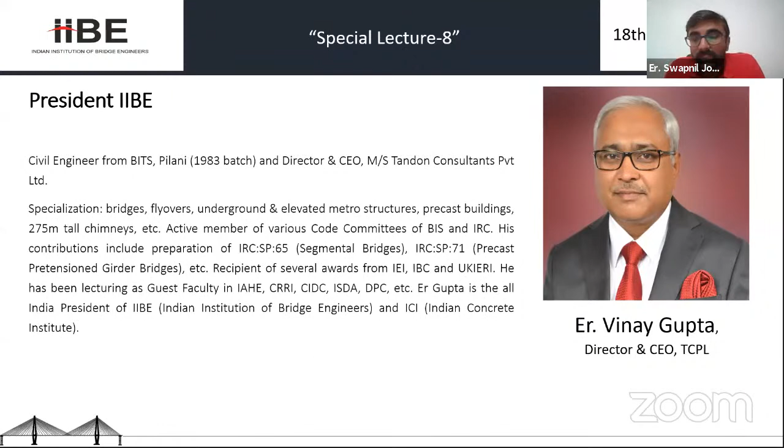So these both pillars are a great support for IIBE to grow further.

Now let me introduce our today's moderator, Dr. Gopal Rai, Honorary Secretary of IIBE and CEO of Dhirendra Group of Companies. Dr. Gopal Rai holds a PhD from IIT Bombay and has a phenomenal level of prowess that enabled him to associate with several prestigious projects including Apsara Reactor BARC, Mumbai Airport Bridge, Strengthening of Mithi River, ESIC Hospital, and JNPT ROB Bridge, etc. He is Honorary Secretary of IIBE, General Secretary of the Association of Structural Rehabilitation and Retrofitting, and a Committee Member of ISAC, BIS, and ACI.

He has delivered more than 680 presentations nationwide and 27 presentations internationally. He has also been a keynote speaker and author in 4 international conferences and published more than 100 research papers in various journals. Dr. Gopal Rai has also been awarded for 50 Manufacturing Innovative Leaders at the World Innovative Congress Award 2019, and also in Dubai for 40 Most Influential Leaders under 40 years, 17-18, by Asia One, and many more.

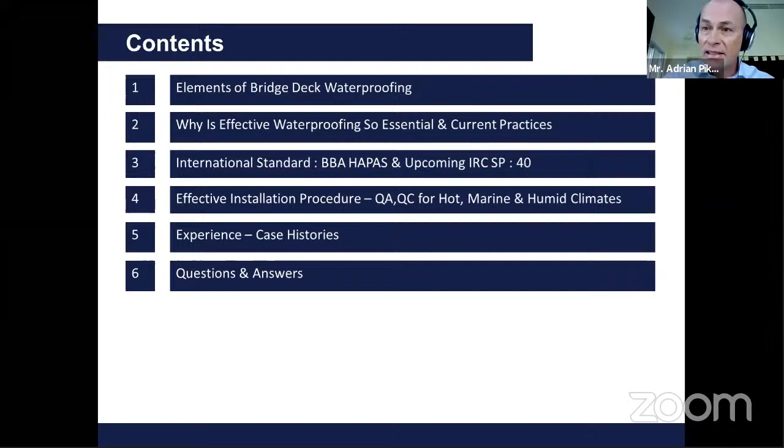So very quickly on our business - USL Group is part of the RPM business. RPM is a North America-based conglomerate that specializes in chemicals and sealants, and included in that is Tremco. Tremco are our local partners in India, with a regional presence here for maybe 20 years now.

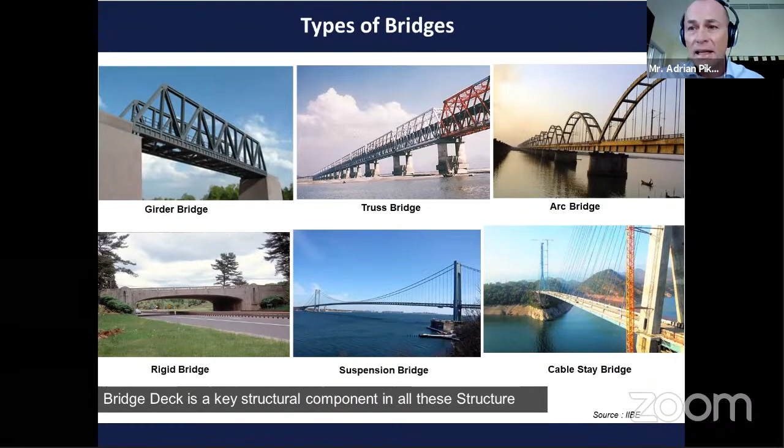There are many different types of bridge. Most of these have been adopted in India, and they've all got the same problem: they'll all suffer from degradation, from corrosion, unless the bridge decks are adequately protected. So that's really the main aim of today's talk. It's not really to talk about any particular method, but to give you a general overview of the technologies available and how they're installed, and most importantly, how they're going to ensure that the life of the bridge will be extended, which is what the subject is all about.

The ultimate failure mode is collapse. Now, I don't want to frighten anybody, but obviously we've had issues in the UK, in America, obviously in Europe recently, and in India. This is not, thankfully, a common occurrence, but if there's lack of maintenance, lack of inspection, and lack of forethought for the materials used, then problems can and will occur.

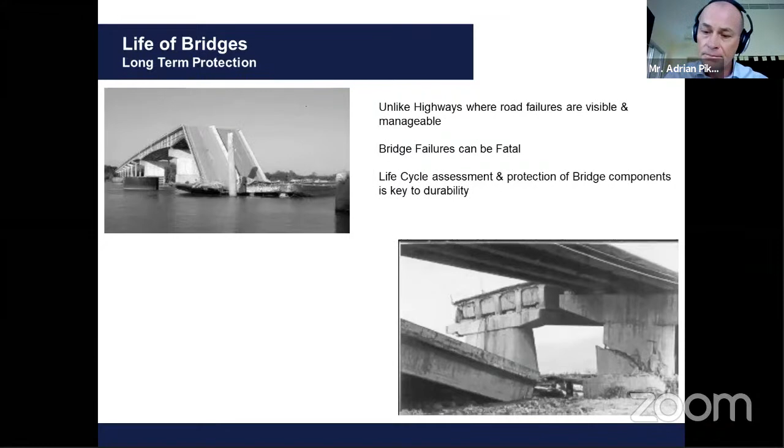So typical elements of a bridge include the bearings, the protection of the bearings, the expansion joints on the bridge deck, drainage. It's important that all the rain that you encounter in India is dealt with, and the water is taken off the bridge as soon as possible, and also the waterproofing of the bridge decks.

So the question's often asked, certainly here in the Middle East, where we get rainfall perhaps 2 weeks a year: why do we need to waterproof structures? It hardly rains, we're in a good climate. Well, these are some of the reasons.

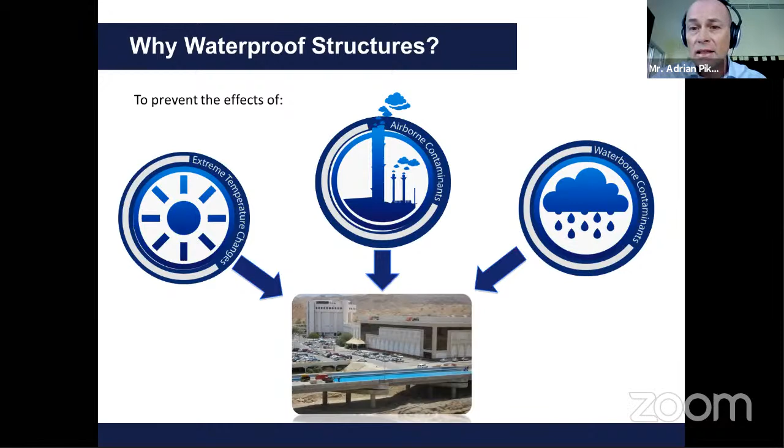Clearly, there are extreme temperatures. Here in Dubai, we can reach 50 degrees, and that's often the case in parts of India. There's airborne contamination, from chemical pollutants and also from the surrounding marine environment. And obviously waterborne contamination, which will take contaminants into the structure, causing corrosion and remediation problems.

And this is the effect, really. We all know that reinforcement can suffer from corrosion. Yes, there are different methods that can be used to protect it, but ultimately you've got about 50 millimeters cover to protect the steel, and the concrete will crack and it will allow water through it. So unless there's a suitable membrane above the deck, then the rebar will become exposed.

Medium term, you can get deck fragments to be destroyed. The concrete will spall, asphalt will pothole, and you will end up with extensive repairs to the bridge. And that's not only the cost of doing the repairs, there's also the...

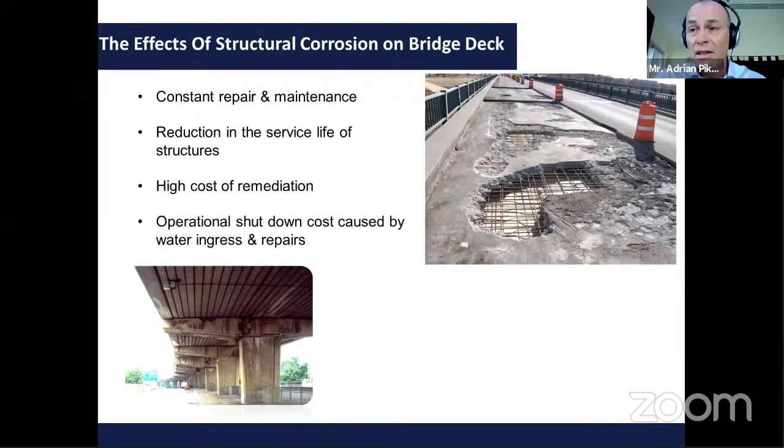bridge access. Obviously, you are stopping traffic on the bridge. You may be reducing the loading. You may be reducing the service. But ultimately, it costs an awful lot of money for the bridge owner if he suffers from corrosion and degradation. So it's a very important subject. And if it's not dealt with today, then maybe in 10, 20, 30 years' time, you'll be faced with quite a large headache, which is happening at the moment in America, in parts of the UK, and in Europe, where waterproofing has been an afterthought.

There are many different systems available to protect bridges. The company that I work for is USL, but Pitchmastic is a subsidiary. The name Pitchmastic comes from bituminous type materials, and we've been involved in that for about 70 years. But systems have developed - like anything else, technologies move forward.

The problems that you can get with bitumen systems are they're typically about 1 meter wide, so everywhere there's an overlap, there is a potential weak spot for water. Water will find the weakest spot, and that's generally the overlaps or details. And if you've got quite a thick, rigid sheet system, then it's very difficult often to get an adequate seal. So they can be problematic.

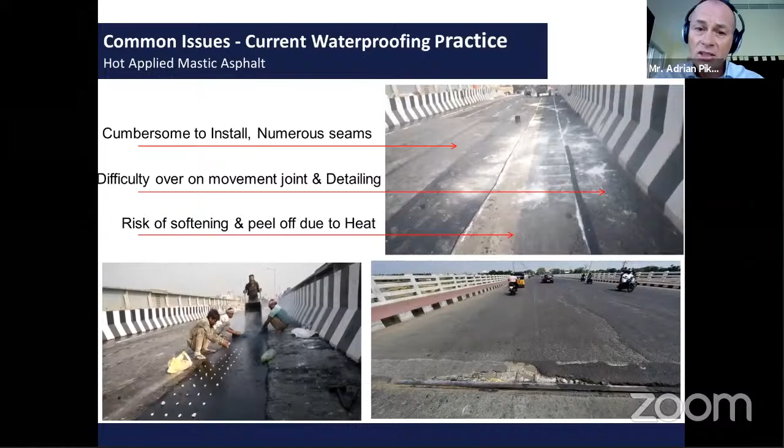Also, in hot climates, clearly, if you're putting a bitumen type material down that will tend to soften under heat, if your surface temperatures of the deck are pushing 70 degrees, then you're going to get some problems with slippage. So it's very important that the material used is not only suitable for bonding to concrete or steel, but also for bonding to asphalt in all sorts of different conditions. It's not just about bonding to the actual substrate.

In addition, some systems are vulnerable to damage during asphalt laying. Most bridges are subject to asphalt being laid afterwards. The pavement typically has 2 layers. The first layer is laid over the waterproofing. If the waterproofing suffers from damage and puncturing, then the waterproofingness of that material will be void from day one.

I mentioned briefly before about compatibility and bonding to asphalt. This is probably one of the main causes of failures. Often testing is done for bonding to concrete, and if the bonding is good, the material is approved. But the main stress comes from the traffic going over the asphalt. The asphalt might be 5-6 centimeters thick, and every time a vehicle brakes, there are tremendous forces imparted on the asphalt and the waterproofing beneath. So if there isn't sufficient bond and compatibility, you will get slippage.

In hot climates, it gets worse and worse. These are a couple of examples of what can occur where the bonding is problematic and the client's got headaches very quickly. He's got to put repairs in, which leads to other problems, and the overall suitability will quickly fail. So it's very important that you get compatibility with asphalt.

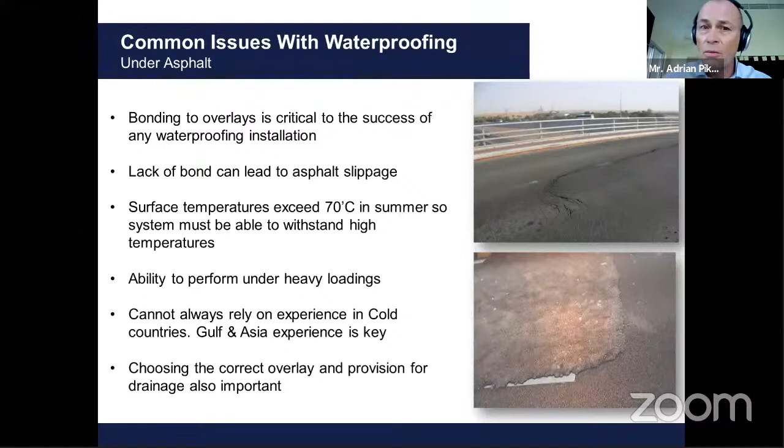Other design considerations are abrasion resistance. Clearly, the waterproofing system is going to be subject to heat, some traffic - there's going to be vehicles over the membrane during the construction sequence. Crack bridging, as I mentioned, the minimum requirement in the UK is 1 millimeter crack bridging. In Germany, it's 2 millimeters. And in some parts of the world, they're expecting at least 3 millimeter crack bridging. So that is a very important consideration for any system.

You can read the others, but clearly installation speed is important. You don't really want a system that will take weeks and weeks to put down and needs perfect conditions when you have temperamental conditions. In India, you get hot days, you get cool days, you get rainy days, you get dry days. So you need systems that can be installed within quite small weather windows in order to get productivity.

So I now talk about specifications, and these can vary around the world because there are different requirements around the world. There are cold climates, there are warm climates, there are wet climates, there are humid climates. So each country often has a different requirement for the membranes.

I'm based here in the Middle East, where it's probably one of the hottest countries in the world, but they generally specify a mixture of UK standards for the waterproofing and some ASTM standards. The one highlighted there is called BD47, which has been the national standard in the UK for 25 years. This involves a lot of testing, not only with the waterproofing, but also the asphalt, the bonding to concrete, resistance to chemicals and fuel oils, freeze thaw, heat impact, etc.

So it's considered to be a good benchmark for any quality of a system. It's put in specifications because at the very least, if it's met those requirements, they know that the membrane is going to be a good, durable system. But that's not the only thing they're looking for - they're looking for systems that will work in that particular climatic condition.

There are also esteemed bodies such as the Concrete Society that are recommending the use of high-performance waterproofing systems, which in their view will provide the structure more durability, which is what it's all about. They're mentioning that they should use different equipment, pinhole detection equipment, which I'll go into later, for making sure that the system is completely integral.

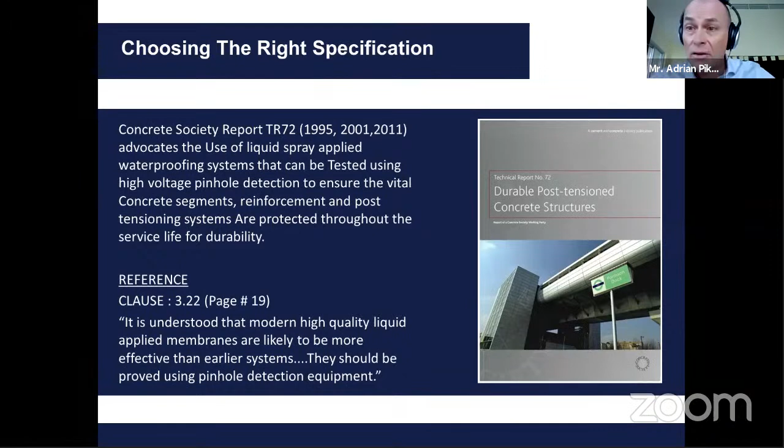In America as well, they have learnt the hard way, really, that doing nothing on a bridge deck will cause you problems in a later day. So now there's a lot of new standards and specifications being issued, certainly in the northeast of America, where they have adopted some of the technology and the experiences that have been encountered in Europe.

I'm now going to talk about the types of high performance or higher technology systems available in the market today. These can be spray applied or applied by a squeegee. Some of them are similar technologies, some are different.

There are systems called Puma, which is a blend of polyurethane and methyl methacrylate. This provides a fairly good blend of performance at different climatic conditions, but they're generally applied by roller.

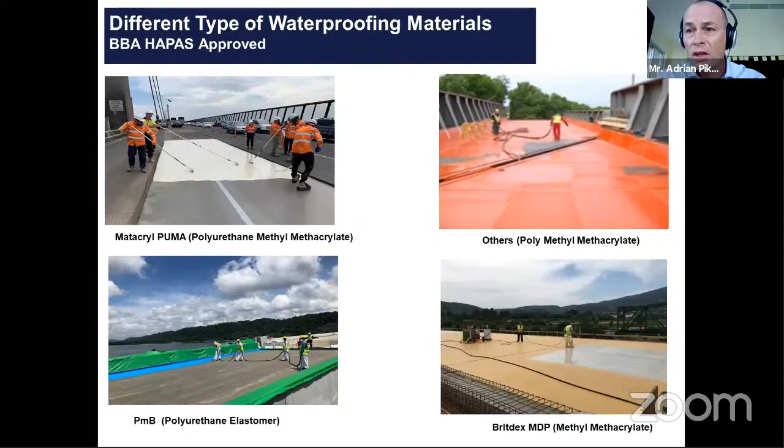Methyl methacrylates are generally spray applied, applied in 1 or 2 coats to achieve the minimum requirement. They've got durability and very good bonding for steel as well, so they're quite well used for steel structures.

I mentioned about the BBA before. The BBA is the British Board of Agrement, the UK government's testing house or testing authority. They're recognised around the world and often used for testing a variety of construction materials, including in our world, the testing of bridge deck waterproofing materials.

The HAPAS standard is very, very stringent. It takes the BD47 standard that I mentioned before to another level, and includes a lot more specific tests related to application and maintenance contracts.

The concrete won't always be smooth, so they do testing on uneven concrete, on irregular concrete surfaces. They also use different types of asphalt, since there's not one type used in the UK or around the world, so they test different types to verify suitability.

They also do things like overlapping tests. If you do a bridge today and have to do the next phase in 6 months or a year's time, you need to know that the two layers will be compatible. So they do aging tests on the material to verify its suitability after a few months or a year in exposed conditions.

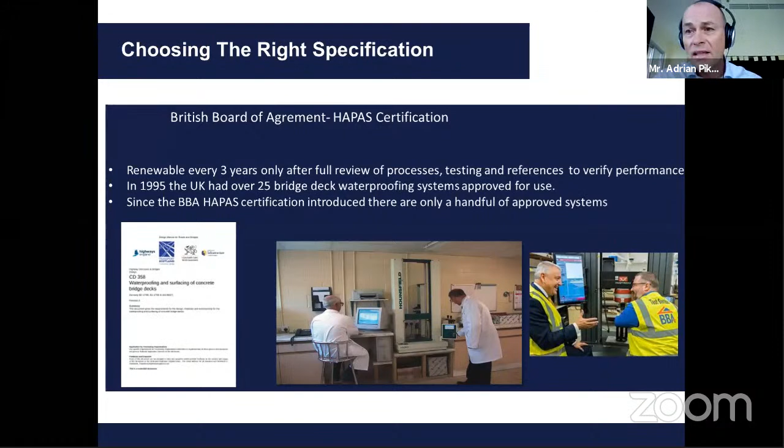Once the new standard came out, there were only 3 or 4 different systems approved. So it reduced the number of systems available, but the client was happy because he knew they would provide durability, which is the most important thing, because the UK was wasting a lot of money on waterproofing that wasn't durable, doing maintenance works within 3 or 4 years of actually laying the waterproofing. Not very cost effective.

Just some of the testing that's relevant for bridge applications. This is a puncture test, to check that the membrane can withstand the rigors of a bridge application, since it's going to be subject to trafficking, site vehicles, and perhaps some concrete curbs being laid.

Crack bridging ability is very important, and it's essential that this is selected as part of the requirements for jobs. If the membrane is stiff or rigid and can't withstand the service conditions, then cracks will form, water will get in, and the membrane is superfluous.

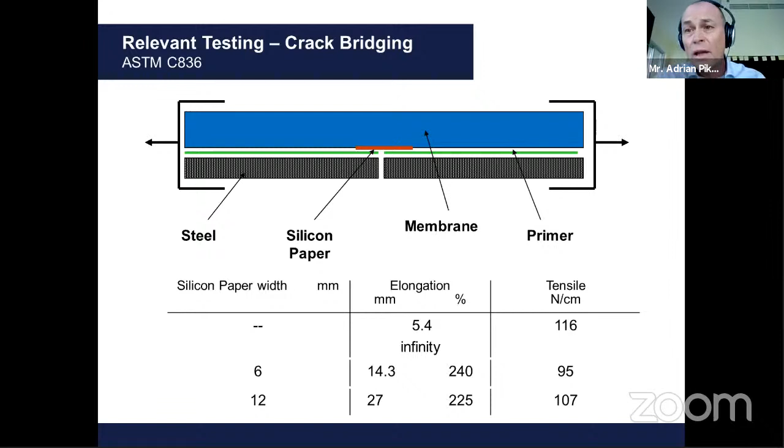This just shows you that you can use thin strips to give increased crack bridging ability. Most membranes, certainly the polyurethane variety, will give you about 5 millimeters crack bridging ability, and that can be extended by applying 2 layers of the material and also using a debonding strip.

For railways, obviously there's no asphalt, but there's tracks and there's ballast. So in order to verify that the ballast will not have any significant impact on the waterproofing, the UK does a ballast indentation test. This involves about 2 million cycles of load under 41 to 185 kilonewton testing, which is equivalent to 25 tons.

Once that's done, the membrane is inspected, and then it's subject to a hydrostatic test to verify there's no leaks or missed areas in the membrane. So again, very severe, but if you're doing a railway, there's no time to repair - you'll just disrupt the traffic and the service. So it's very important the installation is done correctly.

Climatic conditions: there are many manufacturers in the UK and Europe that have great systems that work very well in Europe. But India and the Middle East is not Europe - the conditions, the humidity, the air temperature are completely different. So it's important that anything adopted locally has a good track record and proven durability in these climate conditions, rather than just coming along with a test certificate from Europe.

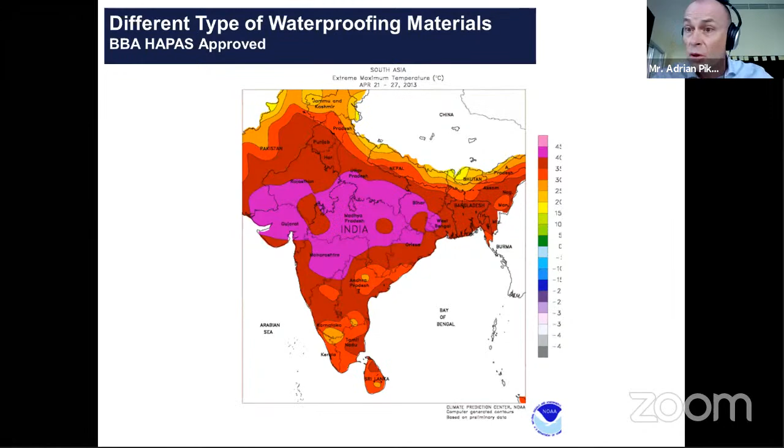Most of the systems are good for bonding to concrete or steel, which is a given. But there are also different methods of application - single or double thickness. And storage and handling is an important consideration.

Obviously, if you're doing a bridge, there might not be sufficient areas to store the materials under cover. And if you've got to put in special storage conditions like air conditioning, it can be very expensive. Some materials need special storage, some don't - that's an important consideration depending on the size of the job and where it is, but it's worth looking at when comparing different products.

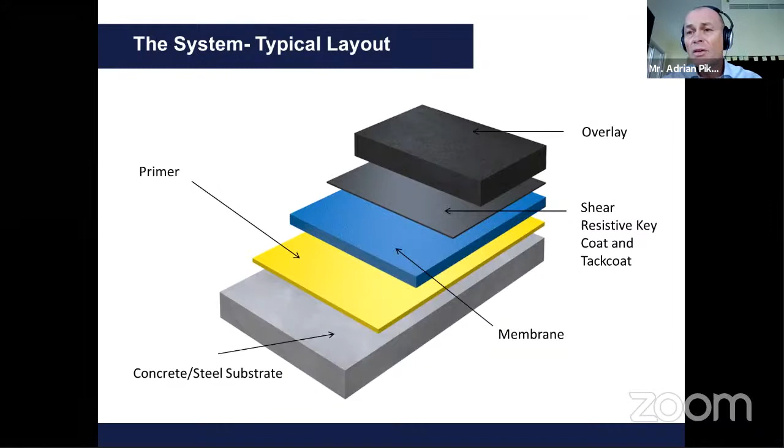So preparation is key to any performance later on. Then typically there's a primer applied over the concrete surface, followed by the waterproofing, and then a degree of bonding medium to the overlay, and then the asphalt material itself.

The first operation really is to make sure that the surface, if it's a new concrete structure, has moisture at a certain level. Too high moisture will result in poor bonding, so generally the rule of thumb is about 6% surface moisture or less. We do that check before applying the waterproofing system, and we also check for air temperature, relative humidity, and dew point.

I mentioned preparation, and I will mention it again - it is vital for any system to work. Generally speaking, if it's a large area, you will use vacuum blasting. It's much cleaner, stops the overspray of grit into marine areas, and it's quick. For areas with existing waterproofing, you'll need grinding or planing of the surfaces. For small, intricate areas, you may need grinding or sandblasting. All of these are suitable, and the end result needs to be clean, dry, and free of any loose materials.

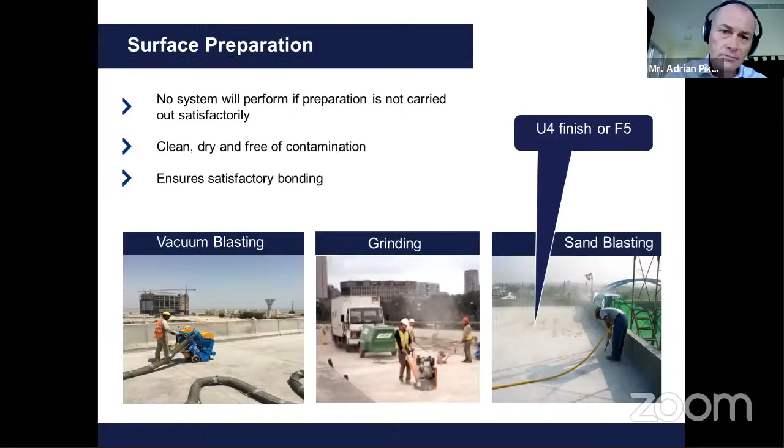So we then commence with a primer, which can be applied typically by roller or airless spray. This is the first line of defense for bonding to the substrate. Then your waterproofing membrane, typically applied at a minimum of 2 millimeters thickness, can be built up in layers of 1, 2, or multiple coats, depending on the client's requirement.

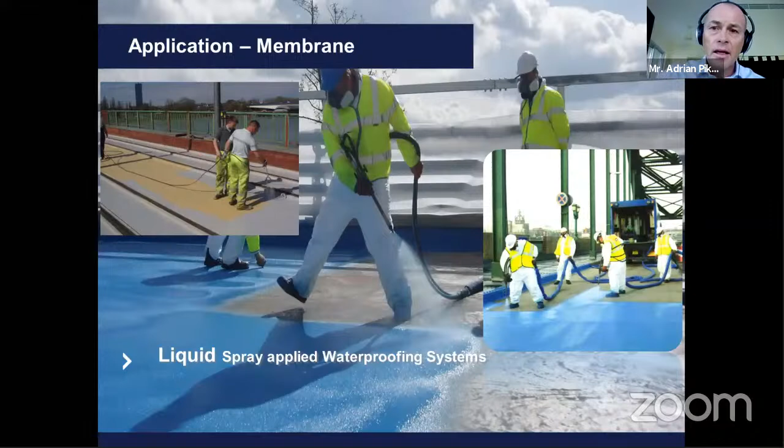Spray machinery can vary according to the type of system installed. There can be high pressure or low pressure machines, depending on manufacturer requirements, but some are designed to be very strict in terms of control. The last thing you want is to apply a membrane that's not in the correct ratio, so some machines have an auto cutout function to stop material being applied out of ratio, which avoids installation errors often caused by materials applied without the correct ratio.

One of the key benefits of a liquid sprayed system is dealing with imperfections in the concrete surface. There's no concrete in the world that's perfect. There will be irregularities, blowholes, footprints, and you name it.

There may be repairs required, but generally speaking, in hot climates you have to be very careful. If you're using cementitious materials, they will cure very quickly, the water will evaporate, and it often leads to cracking and inadequate curing. So yes, you can use epoxies, but often these repair areas can be lined out with the waterproofing material, meaning a quicker application and bonding to the actual structural deck rather than a potential weak bonded repair.

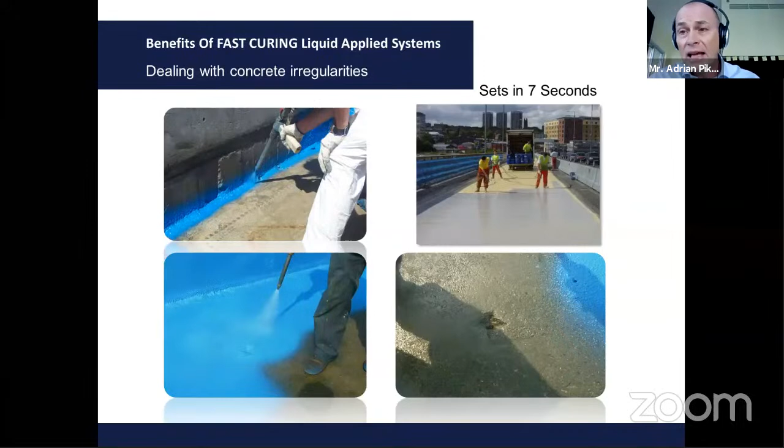In order to make sure the correct thickness is applied, we go through a series of checks that can be inspected by all relevant parties, from the client, the consultant, the main contractor, and the waterproofing applicator. The first is a thickness check using a micrometer, where we take out a sample of the membrane in its semi-cured state, making sure the thickness is the right 2 millimeters.

We then do tensile bonding checks on the membrane, generally done within 1 or 2 hours from application, using typically an Elcometer or similar test device that exerts a force on the membrane above the concrete. What we're looking for is cohesive concrete failure, and generally we're getting a minimum of 1 megapascal or 1 Newton per millimeter square after about an hour. As long as we see the concrete pulling out, we're happy. It all depends on the preparation, which is very important.

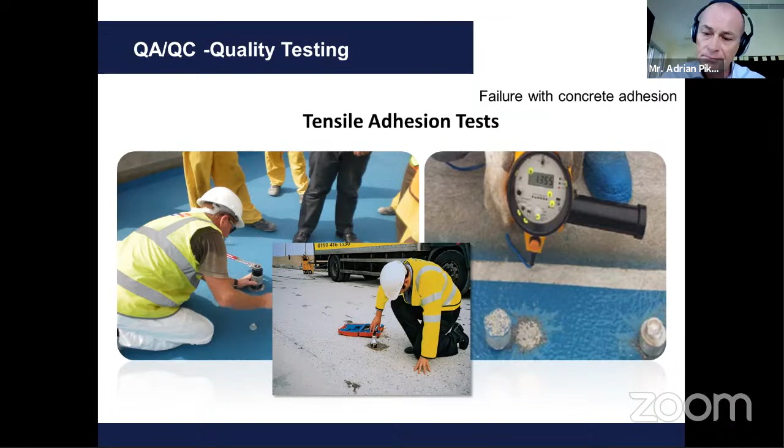The final test we do is called a pinhole test, which involves applying a high voltage DC spark through the membrane. If there are any missed areas or leakage paths, the equipment will bleep, signifying a leak or missed area. Those areas are repaired, and that completes the cycle.

At the end of those operations, the client knows the membrane is of the correct thickness, fully bonded, and completely integral. That cannot be said of many traditional types of systems, so that is one of the main key differences between modern spray applied, high performance systems compared to other varieties.

I mentioned before about the necessity for bonding to asphalt. The traffic loads in the Middle East and in India are often 100 tons, and the axle loads are far greater than Europe, so the pressures and shear forces are that much greater.

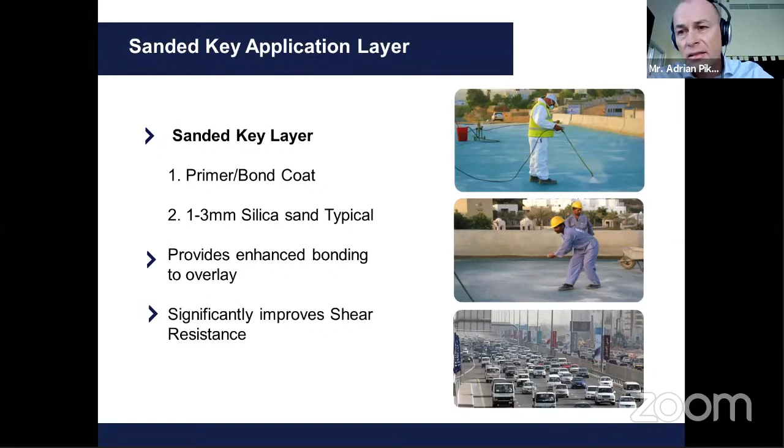So the use of a sanded key layer is considered very beneficial for durability with asphalt. This generally involves a separate layer of primer or bonding medium, then broadcast with aggregates to give a mechanical key to the overlay.

Finally, a bitumen or tack coat is applied, and for these to be durable, they need resistance to heat. They need to do two things: reactivate with the heat of the asphalt, generally between 130 and 190, and also make sure they don't soften too early or too soon. As I said, deck temperatures in India will probably reach 70 to 75 degrees, so if the bonding medium starts softening too early, it will pull up under the tires, causing a mess and delamination problems. So it's important that the specifications are right for the market. Then the asphalt is applied over the system.

I have a video to play, but I'm hoping one of my colleagues will be able to share that for me. Is that possible? I think Deepika or Ruhi. I think we are sharing on video. Yes, sir, I'm sharing.

In terms of the requirements for bonding to asphalt between the waterproofing, it is very important that certain parameters are set. The figures here come from the UK requirements. I mentioned before about the HAPAS standard, and that included different types and thicknesses of asphalt. In India, for instance, the asphalt is probably about 8 centimeters, or 80 millimeters. So the thinner the asphalt, the greater the bond requirement will be.

So you can see there that both in terms of the bonding to concrete, it's 0.7 as a minimum, which we think is quite low. And then in terms of shear bonding, it starts at 0.4 and goes up to 40 degrees, which is a much higher temperature, down to 0.15. So you can see a sliding scale compared to the thickness compared to the result.

So it is important that these are looked at, and clearly testing with local asphalts is also preferred, to make sure that everybody's aware that the bonding can be achieved using local asphalts and the waterproofing system.

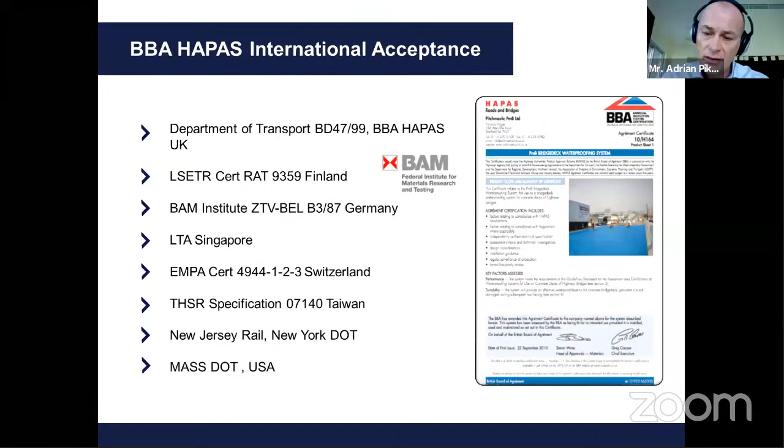There are many different approving bodies that have used these types of waterproofing system. UK, obviously, a lot of the European bodies have got different test standards and methods, really to suit the local markets. And here in the Middle East, again, a lot of local authorities utilise similar standards to make sure they've got a good, durable system.

A very quick look at the IRC, which is the new standard that's going to be issued. We're really pleased to see this, because previously there wasn't much mention of waterproofing in the standards. This has gone on to state that these systems are suggested for bridge decks. They've also suggested that the systems used should have a national and international reference, which again is good. It means that there's a benchmark for the systems, that they need to meet a certain requirement.

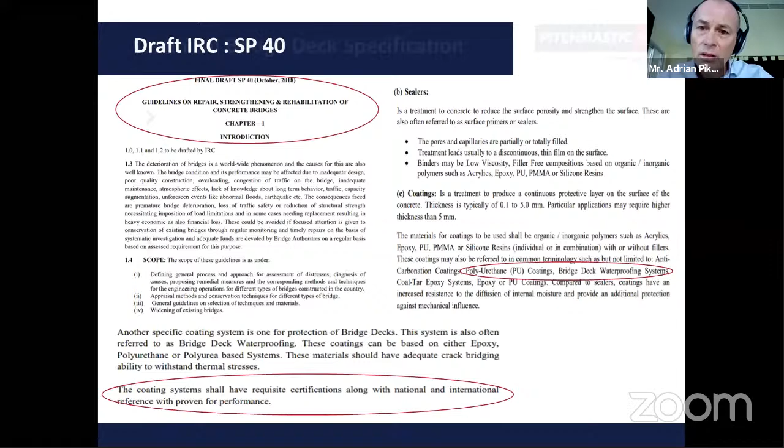I'd like to see more information in there for the actual test requirements. Again, perhaps some reference to international standards might be useful. These are typical specifications where you're talking about ISO 9001, which is quite useful, having the systems mentioned in terms of the type of products, how the systems are installed.

Installation experience, again, is very, very important. As I said, you can have the greatest system in the world, but if it's installed by companies that don't exactly know what they're doing, it can soon turn into a disaster. So having a specification or requirement that has applicator experience, proven experience, we think is very important.

And also mentioning about the QA procedures. Again, applying a system is fine, but the bridge owner wants to see that the thickness is there, the adhesion is there, and that there's no holes in it. So having these interwoven into the specs is probably not a bad idea.

There are also other sister specifications, if you like, SP65 and SP112, which again are good references for specifications as well.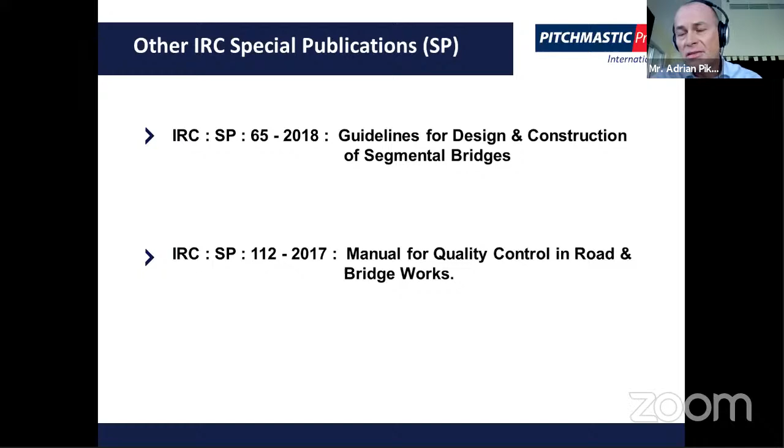This is typically the way that the bridge would be detailed. Obviously, the membrane would be applied over the prepared bridge deck through up to the parapet level. If it's an existing structure, then it would go through any service areas, any service bays as well. And in the UK, we often do the inspection galleries and spray up to the bearings as well underneath the bridge, so it's something that might be considered useful. And then obviously the asphalt and concrete is applied above it.

Again, just some examples from around the region that talk about the system needing at least 10 years experience. It's probably not a bad thing to have products that have got some track record and durability.

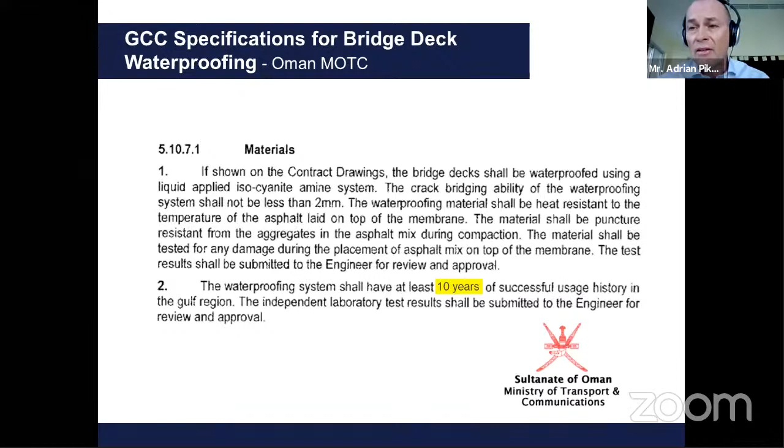And again, I mentioned about the applicator. This is a thing that's used in Oman, where they're looking for the applicator to have experience as well.

Finally, just a look at some case studies of bridge projects done around the world. This is a project in Saudi Arabia, a steel and concrete composite project. The main steel arch bridge was actually built in Dubai and shipped over to Riyadh to be constructed, and then either side there's a concrete flyover approaching the bridge.

Adrian, if you allow me to play the video, the application video. No problem, Gopal sir, can I play the video, the application video? If I stop sharing, you can jump on, Bhavin, yeah? Is the screen visible? That's it, Bhavin. Well done. Yes, sir. Is the audio there? Is there an audio? No.

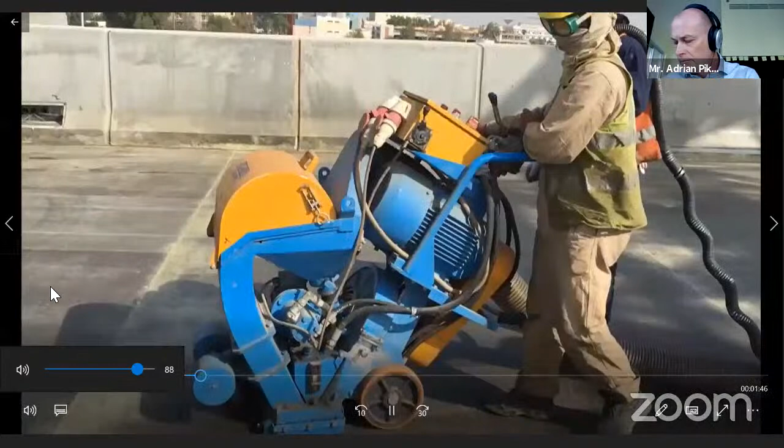Primer application: the PMCS01 polyurethane primer is applied to the prepared surface by airless spray or roller and typically cured in 1 hour. PMB waterproofing membrane is a two-component spray-applied elastomeric system which forms a seamless, watertight and corrosion-resistant barrier to protect the structure. It is rapid curing and gels in around 5 seconds.

Testing: to verify the correct thickness and prove tensile adhesion. A high voltage integrity test is finally carried out to verify quality.

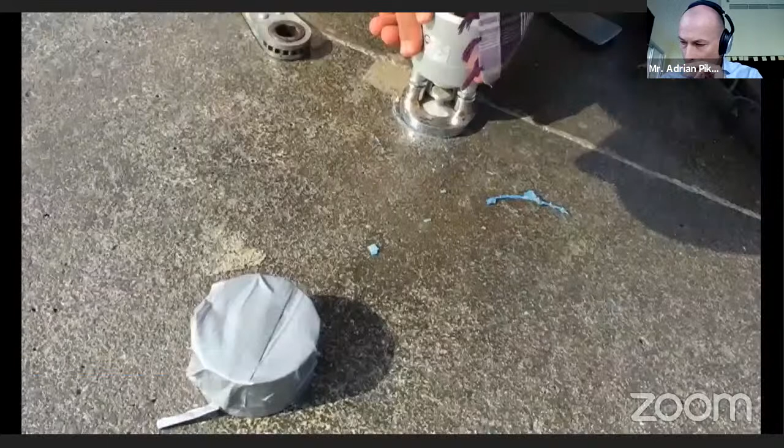Key coat: the bond to the overlay in the Middle East is critical due to summer temperatures, relatively thin overlays and heavy truckloads. Therefore, a two-stage process is carried out to enhance bonding. The first involves a shear resistive key coat comprising a primer and a 1 to 3 millimeter silica sand.

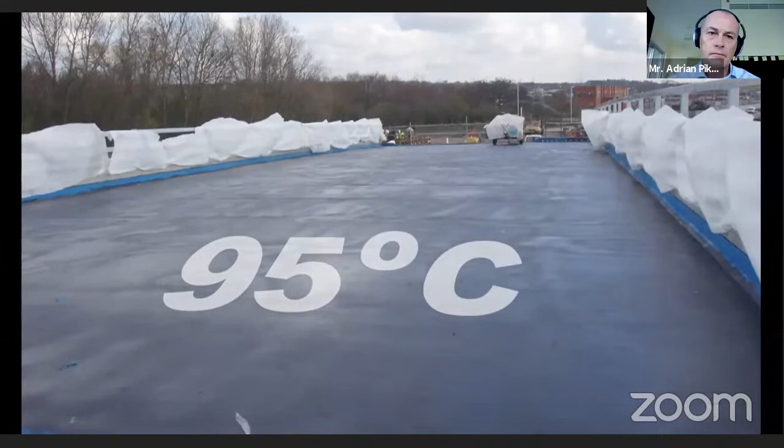Tack coat: the second part of the process is to apply a polymer-modified bitumen tack coat. The product is specifically designed for hot climates and has an elevated softening point of around 95 degrees Celsius. Asphalt. Typically 12 hours.

Yes, I have unshared the screen. Yeah, thank you, Bhavesh ji. Bhavin ji.

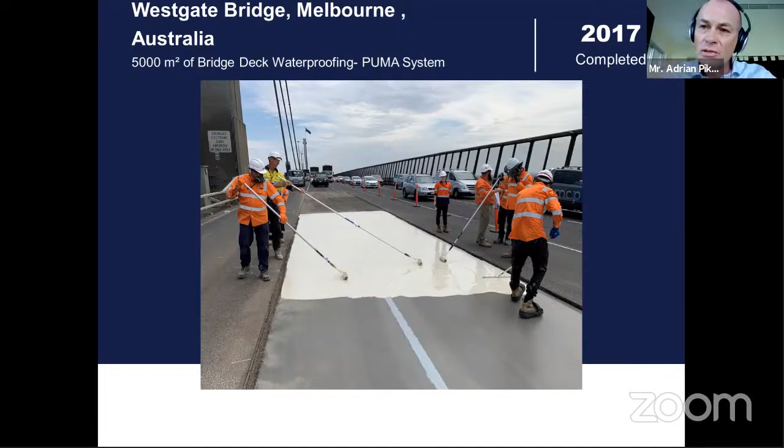That's great. This is in Australia using a Puma system. This is an existing bridge, a very busy structure in Melbourne. What happens is every sort of Christmas period, they allow them to close certain sections to do essential maintenance work, giving quite small sections each year. This has been going on for about 3 or 4 years now, so this is a small section that's being done. They just can't allow the bridge to be closed for any length of time, so they just do a small section and then move on to the next one.

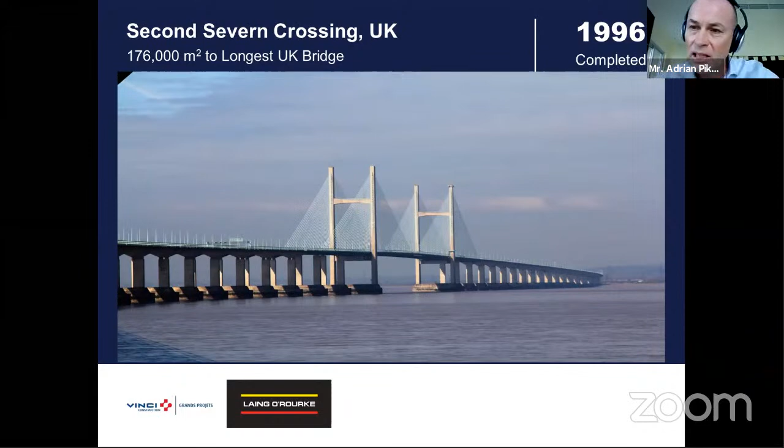These systems can be used as wearing surfaces as well, so a combined waterproofing and wearing course can be used. If you have situations like a bascule bridge or a swing bridge, or a structure that just can't take the loading, you can put durable wearing surfaces on that are maybe 6 to 10 millimeters thick, providing quite a long service life for that particular structure.

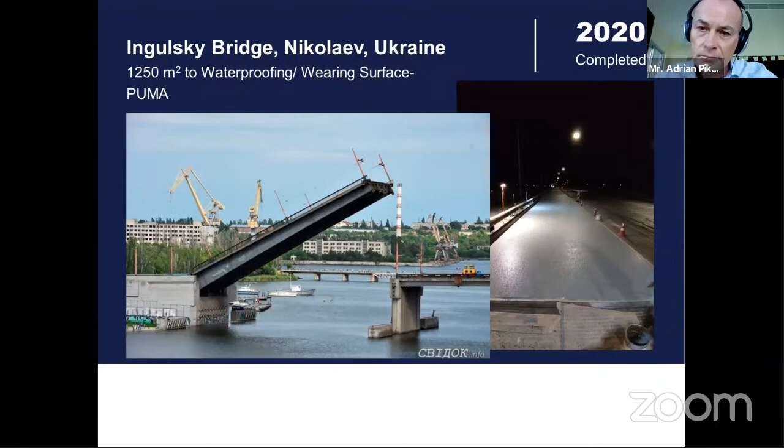A few years ago we did the Batinah Expressway, which at the time was one of the largest jobs in the Middle East - 265 kilometers of new road, involving about 85 new structures. We worked there for L&T, Galfar and NCC in Oman.

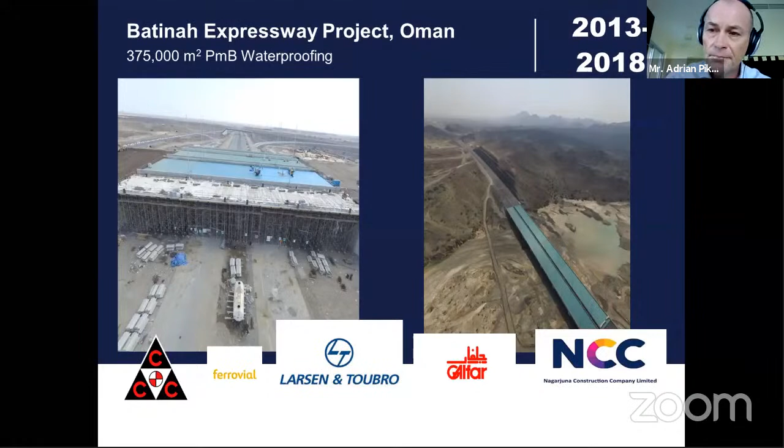The contractor applied this system to 2 lanes, and traffic was kept open on the rest of the bridge. We're removing the existing waterproofing, preparing the surface by sandblasting and shot blasting, and then applying the system.

This is an overview of what we were doing - a very, very quick program. They were only given about 2 months to complete the entire project, so very fast track over the summer period, June to August, to maintain traffic flow.

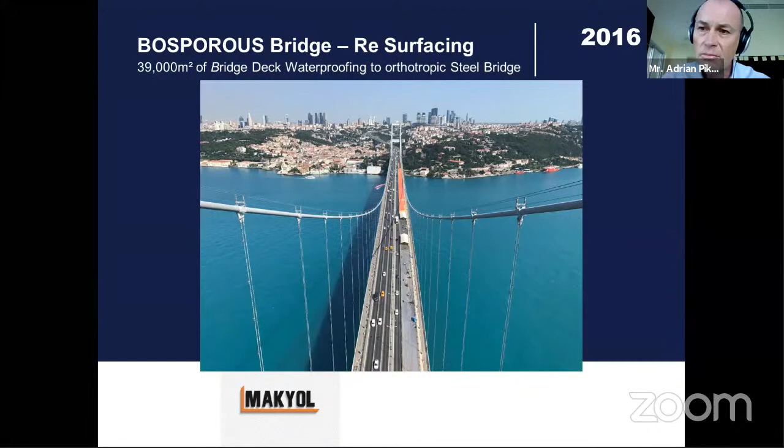And now there's another video here. I don't know whether Bhavin can jump to the rescue again and play this one. Gopal sir, do you want me to play that? Yes sir, Bhavin here, shall I play the video? Yeah, please.

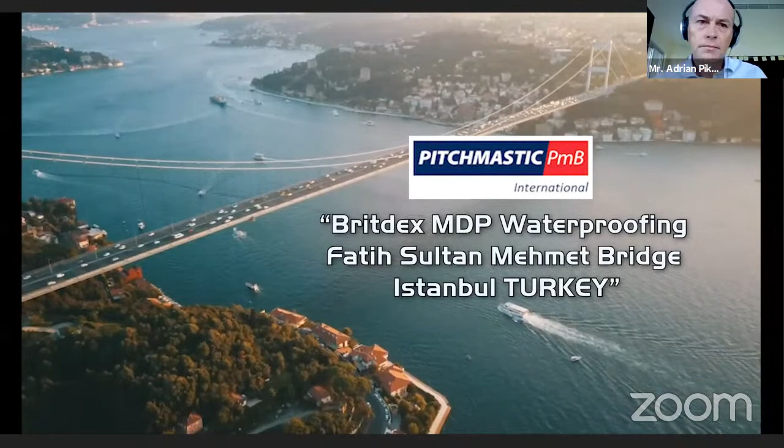Yeah, thank you Bhavinji, good. I think Mr. Pike you can continue. You're unmute, please unmute. Thank you for that.

So I think we've just got a couple more slides now, guys. And one includes another video - you'll be pleased to hear.

Can you share the screen first? I think Mr. Bhavinji, you have to. No sir, he has some slides and then the video will come, sir. Okay. His laptop is, I think, that connection is some issue.

Okay, so we've left the best one to last, I suppose. It's the longest sea crossing in Southeast Asia, completed last year - 30 kilometers of new bridges connecting Temburong to the main part of Brunei.

So very extensive project involving, as I said, probably 100 men, multiple spray machines, nearly 2,000 tons of material, all shipped from the UK in very quick time. So very proud of this one.

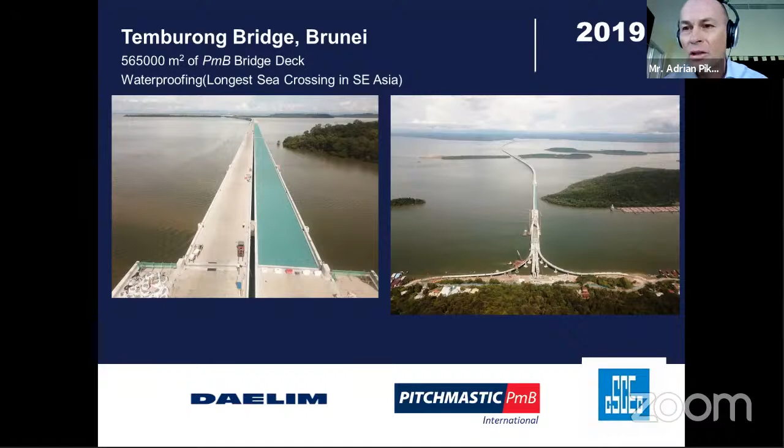So Mr. Bhavin, if you could take the floor again and just show the final video, and that will conclude today's presentation. Thank you so much. Yes, Mr. Bhavin, yeah.

Is the audio there? Yeah, we can see. No, but the video audio is not there. Yeah, it is there.

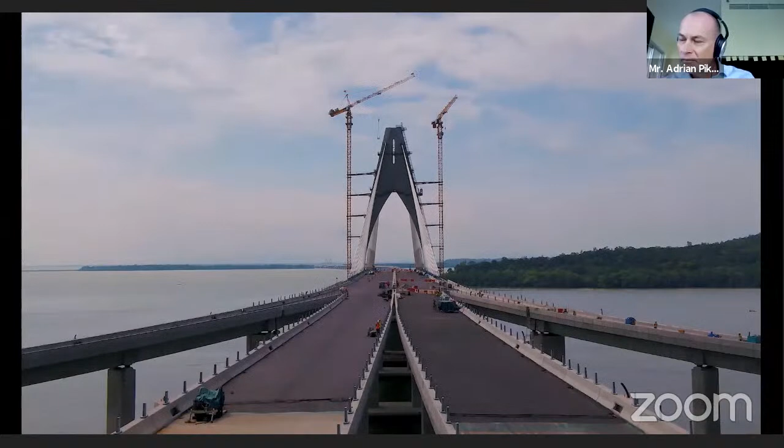This bridge project is quite simply a one-off. It's one of the largest bridge projects in the world, in the top 10, and at the moment it's the longest sea crossing in Southeast Asia. The entire length of this project is 30 kilometers. Compare that to the longest bridge in the UK - it's 6 times the length of the Second Severn crossing. Having done the Second Severn crossing 25 years ago, to deliver a project of this scale, you can imagine how proud we are as a business.

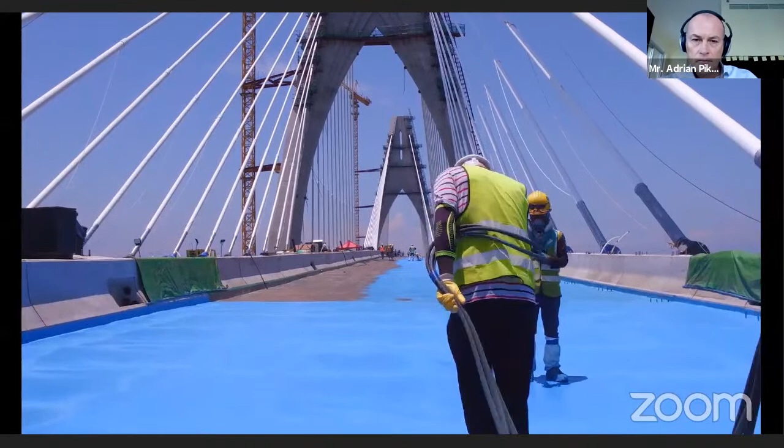The waterproofing system that you can see around me is called PMB, a 2-component spray-applied polyurethane system. Pitchmastic's involvement is to supply and install our PMB system. Pitchmastic is not only supplying a world-class material, we're also installing it using our trained and highly skilled people. That sets us apart from others in that we don't just sell products - we manufacture it, we formulate it, we deliver, and we install, and we quality test and verify on site.

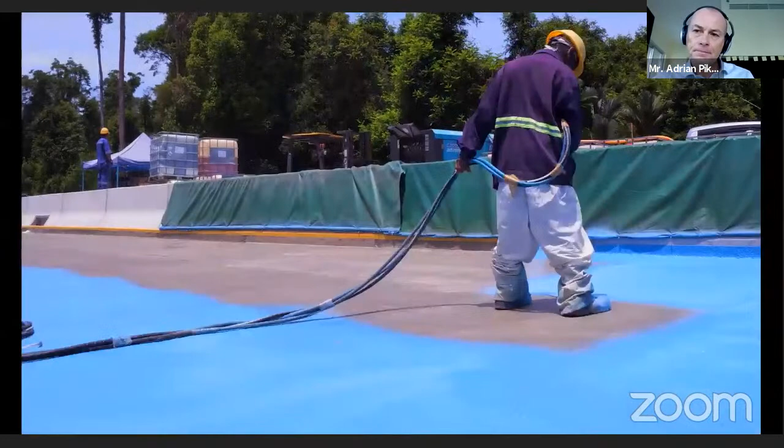Prior to the bridge, the only way to get across was quite an arduous ferry run or a 2.5-hour drive through Malaysia. So clearly the project is connecting families, communities, and it will be a legacy project for His Majesty the Sultan. We can tackle a job of this size, of this extremity. It's a magnificent civil engineering project that we're very, very proud to be involved in.

The USL Group is the pinnacle of 6 years hard work, and we're very fortunate to have been awarded the contract for the entire bridge. So we can proudly say that we're doing every square metre of this project, and we're delivering a quality, professional service to the ultimate client, the Ministry of Development.

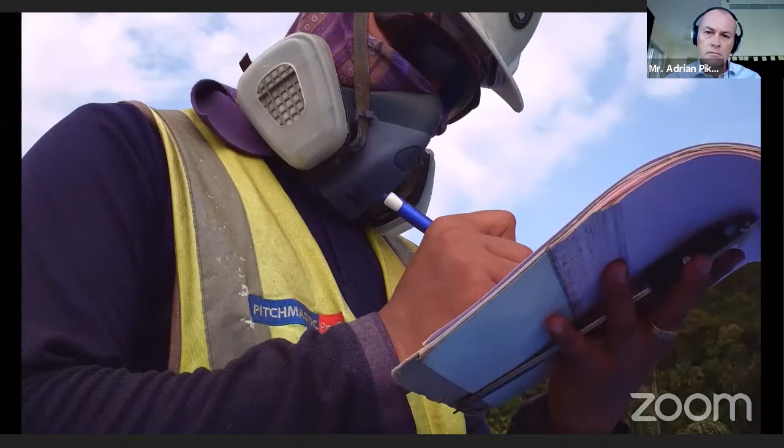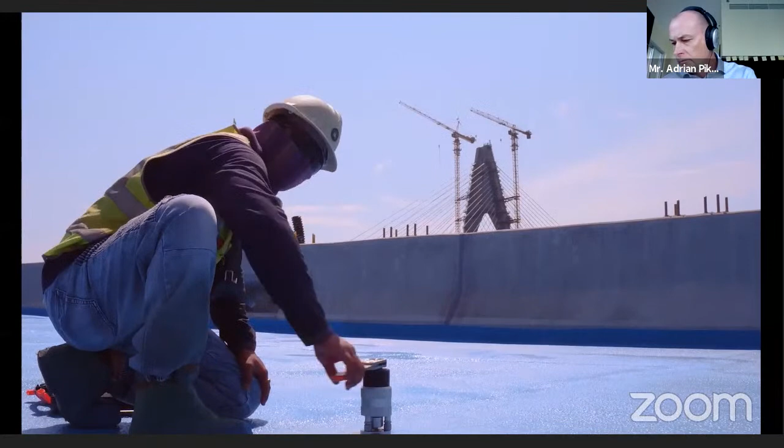The USL Group has some fantastic people, and none more so than the guys in Temburong, and also the people that we work with who've made a lot of self-sacrifices, worked here for extended periods away from their families, and we're very thankful for those people who have made sure that the project has been a success, and everybody on the team must be very, very happy with their performance.